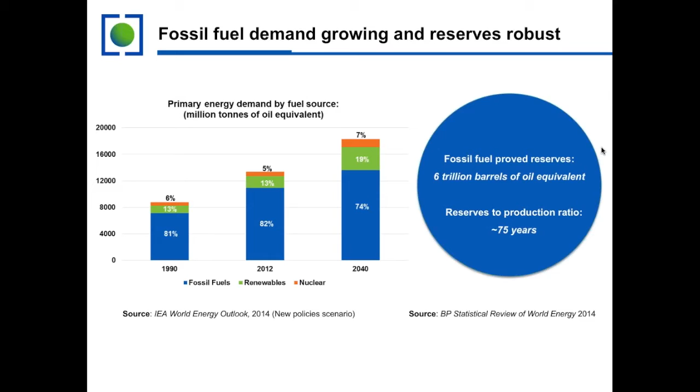We also have projections that tell us that if we continue to emit greenhouse gases into the atmosphere, we'll see significant impacts on the climate. The Intergovernmental Panel on Climate Change, or IPCC, has told us that if we want to avoid the most serious impacts of climate change, we need to limit the increase in global average temperature to 2 degrees C. That corresponds to a concentration of CO2 in the atmosphere of about 450 ppm.

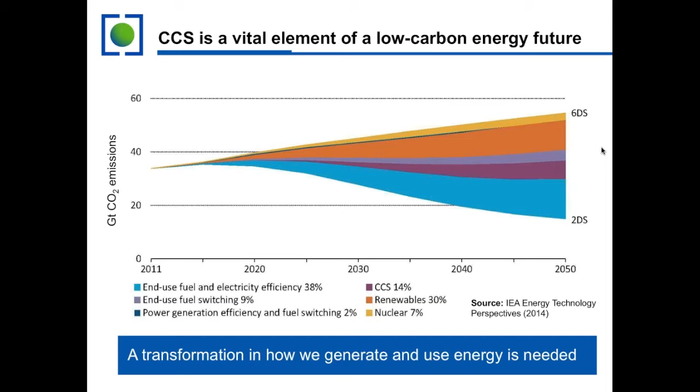In addition, the IPCC conducted analyses that looked at the impact of eliminating different greenhouse gas mitigation measures. Using this approach, they ran several different model scenarios to determine how many could still achieve the 2 degrees C goal, assuming that some of the mitigation options were removed as possibilities. And what they found was that if they removed nuclear, solar, wind, and bioenergy, most of the models could still achieve the goals. The added costs associated with meeting the goals were relatively small for nuclear, solar, and wind. They were a little bit higher for bioenergy.

However, if CCS is removed, most of the models were not able to achieve the 450 ppm goal, and the costs of meeting the goal increased by 138%. So this just shows that CCS is a critical component in decreasing the costs associated with meeting greenhouse gas emissions goals.

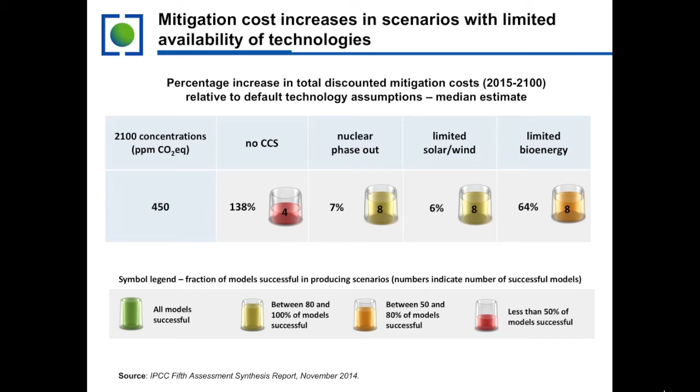So where are we now in terms of CCS development and deployment? If we look at what has been done up to this point, we see a couple of interesting things. First of all, most of the large-scale projects have been in sectors where separation of CO2 from gas streams is really just a normal part of doing business. This graphic shows that.

We've seen a lot of projects associated with natural gas processing, fertilizer production, and syngas production. The one exception to that is the Boundary Dam project, and I'll be talking a little bit more about that later on in the presentation.

If we look over the next couple of years, we see several additional large-scale projects that are projected to come online. In fact, they're projecting that 8 will come online in 2015 and 2016, and that'll represent a more than 50% increase in operating projects globally.

If we look out farther in time, what we see is that there are many more projects that are projected to go forward in the power generation sector, but also important projects that will be moving forward in other sectors such as cement and steel production as well.

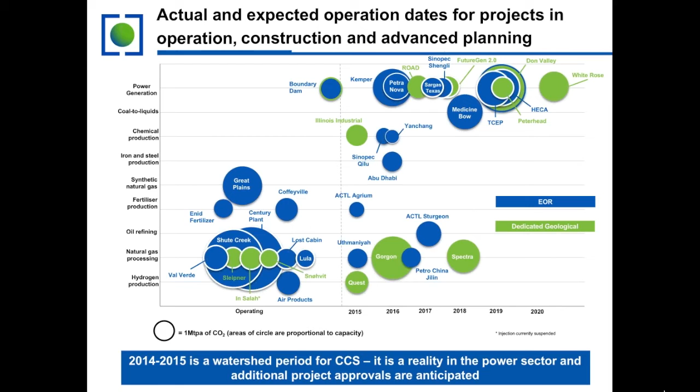In the gas stream that's being treated, you can either use a chemical absorption approach or a physical absorption approach. Chemical absorption involves the formation of actual chemical bonds between the gas and the solvent. They're attractive in that they have fairly fast kinetics. The faster the kinetics of uptake, the smaller the reactors can be.

That approach is useful for low pressure operations, and so low concentrations of CO2 in the gas that's being treated. For instance, post-combustion capture for power generation is typically looking at chemical absorption type technologies. But a significant issue associated with that is that it requires a lot of energy to regenerate the solvent and reverse the chemical reaction. I'll talk a little bit more about that as I move forward.

The other type of absorption technology being used right now is physical absorption. In physical absorption, the gas and the solvent form fairly weak physical bonds. That's nice because it doesn't necessarily require heat to regenerate the solvent, but instead uses a kind of pressure swing to regenerate the solvent. So it's nice for higher concentration gas streams, such as those associated with pre-combustion capture, or in a lot of cases, natural gas sweetening.

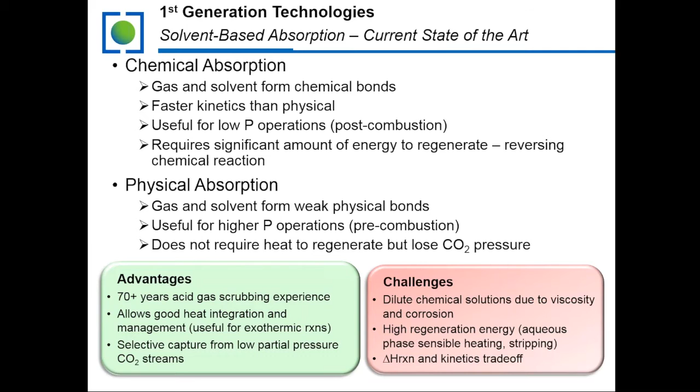Those challenges include the fact that a lot of times the solvents used, the chemical solutions used, have to be fairly dilute. You've got an active solvent that has to be diluted typically in water. For instance, for amine-based capture, the concentration of the amine in the solution is typically on the order of 30%, maybe as much as 40%. It has to be that low in order to avoid problems with viscosity and with corrosion. That then leads to other challenges associated with using the absorption-based technologies.

The Boundary Dam project that I touched on previously is the first project in the power generation sector where capture is being demonstrated at scale. Boundary Dam is a multiple unit power station that burns lignite coal, and previously, prior to this particular project, all of the coal use was unscrubbed, so they didn't have any sulfur mitigation on the plant up to the point of this particular project.

The way this system works, in the picture, that is just the capture plant. The actual power plant would be off to the left in the picture. If you take a look at the picture, on the left-hand side, you have two reactors with kind of triangular tops. The first one is the sulfur removal reactor. The flue gas comes from the power plant and goes through the sulfur removal reactor to bring the sulfur concentrations down to appropriate levels so that the solvent can handle that.

Then the gas is moved into this larger reactor that has steam coming out of the top, and that's where the CO2 is separated from the flue gas. That separated CO2, or the solvent with the separated CO2, is then piped over to this kind of silver reactor sticking up above the top of the building, and that's the stripping unit. There, the CO2 and the solvent are separated from one another, and the CO2 is then moved to a compression system in the building where it's compressed, treated, and sent on for EOR operations in a nearby oil field.

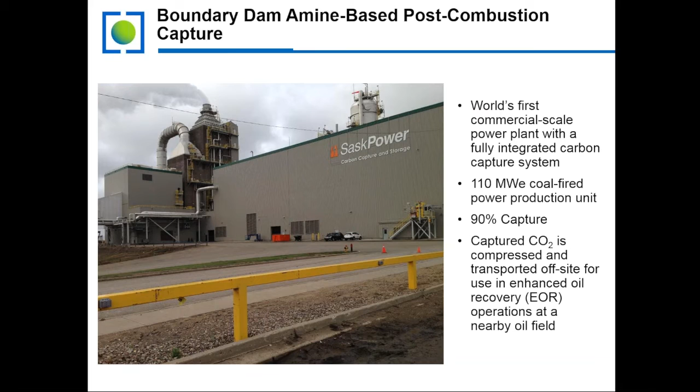Capture systems are in place, but there are still barriers to deployment. One of those barriers is the energy penalty. What that means is that some of the energy that would normally be used in a power system to help produce electricity instead has to be used to drive the capture system, in the form of steam or electricity. That degrades the amount of power generated by the facility by 20 to 30%. Another issue is the cost.

Putting in one of these systems can have a significant increase in the cost of electricity, and that's another factor that needs to be addressed through R&D in the future.

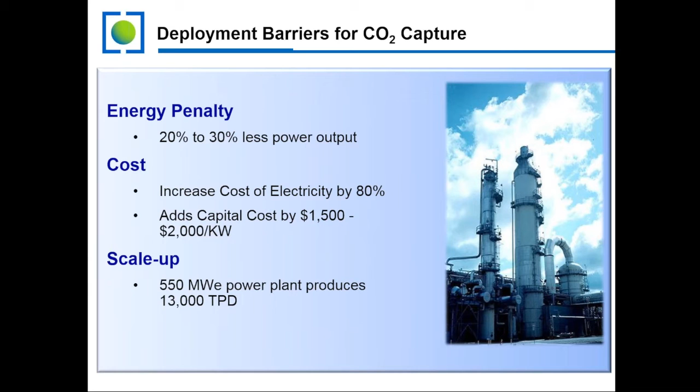Another issue is scaling up these systems. Like I said, they're very large. The unit being treated at Boundary Dam is about 110 megawatts, and it captures about 3,000 tons per day of CO2. A 550 megawatt plant is going to produce a lot more CO2. Up until Boundary Dam, the larger capture units were on the order of hundreds of tons per day rather than thousands.

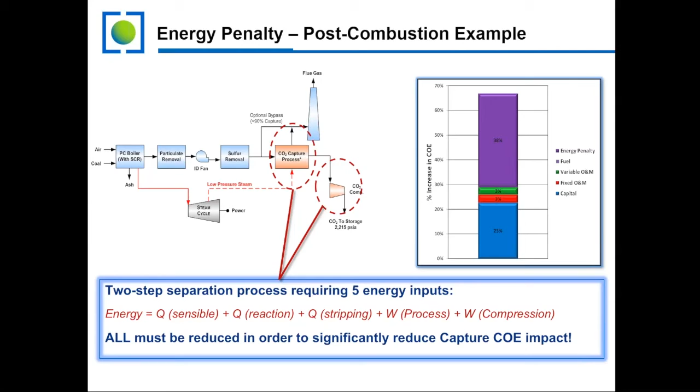You also have a significant electrical energy input into the compression process. In terms of the increase in cost of electricity associated with capture, over half of it comes from the energy penalty, whereas most of the rest comes from capital costs. There are multiple factors that go into that, but the most significant is just the size of these systems.

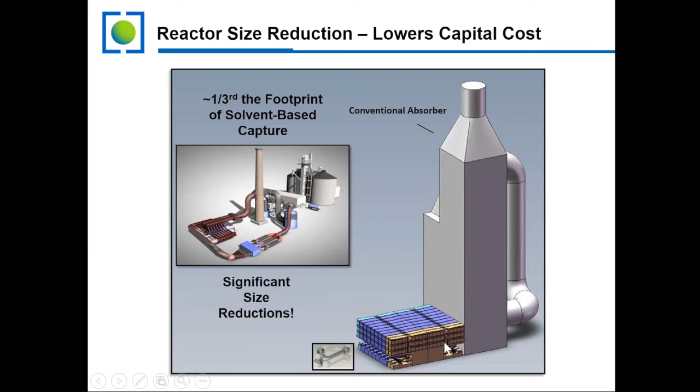This is a drawing of what the Boundary Dam system looks like. One of the goals of R&D in helping to drive down costs is to reduce the size of the equipment. There's lots of concrete and steel that goes into these large units, so if the cost can be reduced, that would be a significant benefit. Some of the technologies depicted here I'll talk about more later, but again, if you can reduce the size of the equipment, the cost goes down significantly.

The Department of Energy has an R&D program in the US trying to reduce the cost of CCS. The targets developed are for second generation and transformational technologies. For second generation technologies, they want to reduce the cost of electricity by 20% compared to current costs associated with carbon capture, and they want those technologies ready for deployment or demonstration starting around the 2020 time period.

They're also funding development and R&D on transformational technologies, which have a more significant reduction in cost of electricity associated with them, and will be ready in the 2030 timeframe. I was just at a presentation the week before last where they indicated their target is going to be a 30% cost reduction for the transformational technologies.

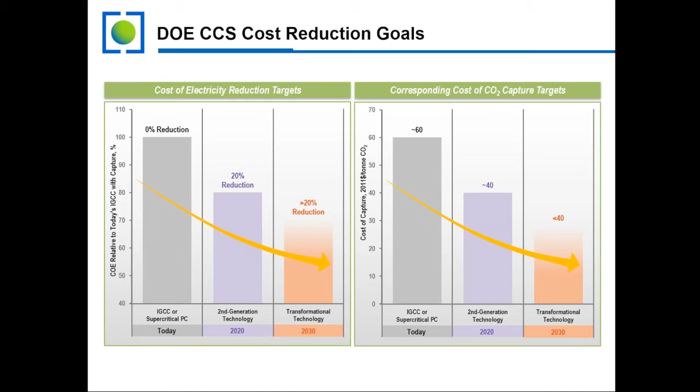One of the areas that's being pursued is CO2 conversion, or converting the CO2 into something else.

Another area is CO2 condensation or desublimation, where you convert the CO2 into either a liquid or a solid and remove it from the capture system, or remove it from the flue gases that way.

Another area that is being actively pursued is CO2 adsorption. So you expose the flue gas stream to a solid sorbent, and the CO2 interacts with that solid sorbent and is removed from the flue gas stream.

Another area is CO2 absorption, and that is the solvent-based systems that we've talked about earlier. Some of those solvent-based systems are in use right now, but there are new solvent or new absorption-based systems that are under development as well to improve the performance.

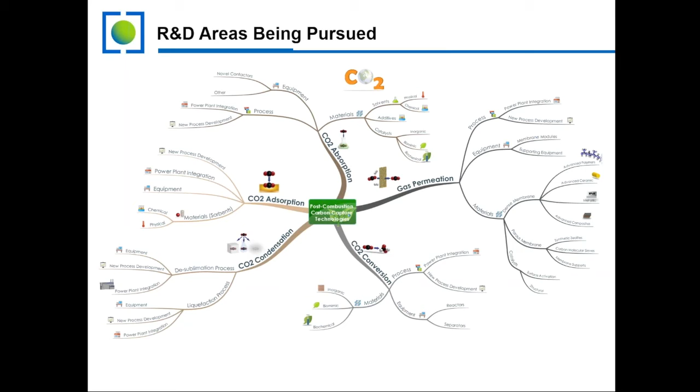So if you take a closer look at one of the arms in that previous figure, what you see is that there are really three basic areas that are being pursued in terms of R&D in each of those categories. And those include materials, equipment, and processes.

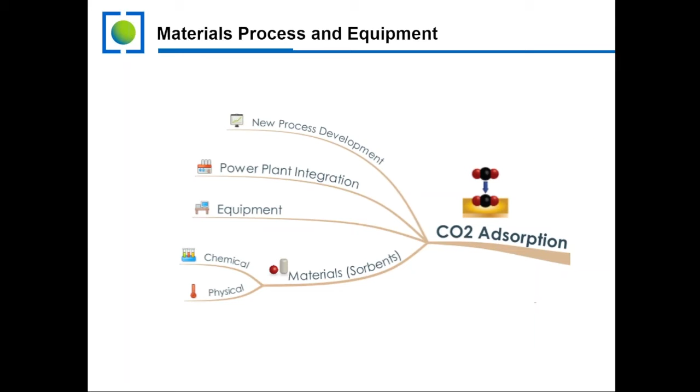So, for instance, for CO2 adsorption, they're looking at materials, solid materials that do a better job of taking up CO2 and require less energy. Different equipment configurations and processes, and I'll talk a little bit more about that. And then different ways of running these systems in more efficient ways.

Again, going back to the DOE program, they currently have a whole series of projects that are undergoing testing at the pilot scale. So these are projects that have already been advanced beyond the laboratory scale and are now being tested at small pilot scale, which is typically in the 0.5 to 1 megawatt range, and then also looking forward to testing them at larger scale in the 10 to 25 megawatt range.

And so if you look at projects that are ongoing right now in the DOE portfolio, what we see is that most of the pilot scale projects will be completed somewhere in the next 2 to 4 years. And then they'll be ready to move on to the large pilot scale.

In the figure, the solid colors indicate projects that are underway and moving forward. The more transparent arrows show the timeline for developing these projects, so that they haven't been funded yet, but that's the time frame under which they would most likely move forward.

And so what you see here is that for the most part, they are targeting large-scale pilots up to the 2020 timeframe, maybe just a little beyond, and then demonstrations following that in the 2020 to 2025, 2026 timeframe.

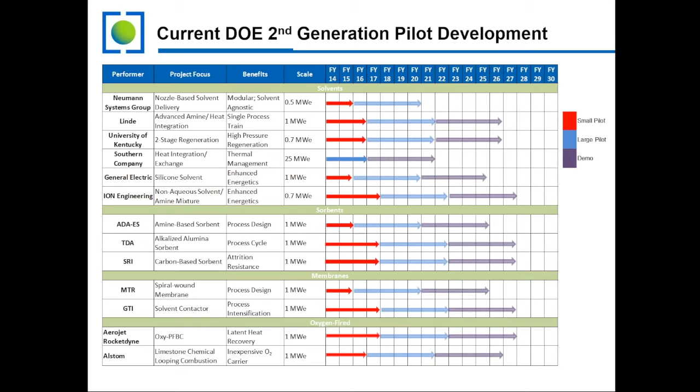There are too many of them to talk about all of them, but I wanted to provide just a few examples of some projects that are moving forward in this pilot scale development effort.

So one of them is a project that is being conducted by the Neumann Systems Group. This is a group in Colorado that is developing a contactor, a nozzle-based contactor that improves the contacting of the solvent stream with CO2, with the flue gas stream. And one of the significant advantages of that particular technology is that it allows for significant size reductions.

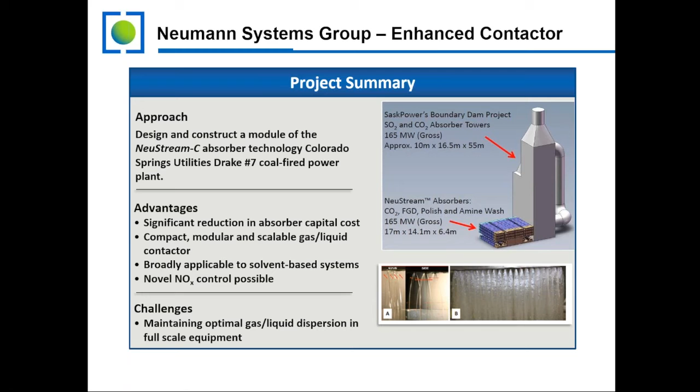And so this is a graphic depicting that. So again, looking at something the size of the Boundary Dam project, for the equivalent treatment of an equivalent size gas stream, the Neumann reactor would be much smaller, and again, drives down capital costs in a significant way.

Another project that is ongoing is by Southern Company at Plant Barry. And here they're testing a Mitsubishi solvent at a 25 megawatt scale. And the project specifically they're looking at here involves heat integration of both the power plant and the capture system to use heat that would normally be wasted.

And so if they can use that heat, they can increase the efficiency of the overall process and thereby reduce costs. And so this is a project that is focused on process for the most part, but also some equipment in the specialized heat exchanger that they're using to facilitate this process.

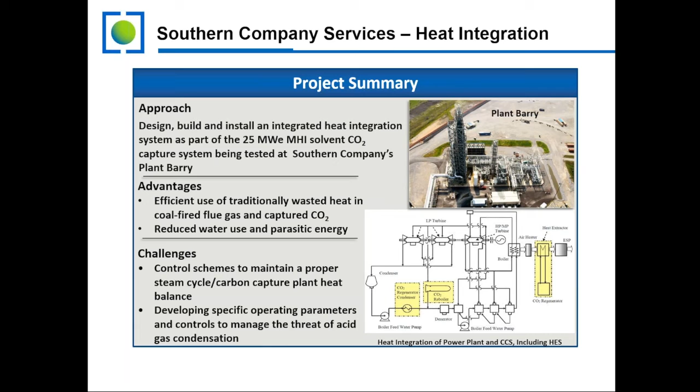Another one that is solvent-based is by Linde, being conducted at the National Carbon Capture Center in Alabama. They are doing a 1 megawatt slipstream test, and they've recently increased their treatment volume a bit, so they're at almost a 1.5 megawatt slipstream scale. There they're testing a solvent with improved characteristics in terms of uptake and regeneration. As part of that, they're projecting much lower electrical load through capital cost reductions and smaller reactors. Only one reactor train would be able to treat a 550 megawatt power plant, for instance.

So this is an area where they're really doing all three areas. They're doing advanced testing on an advanced solvent, a material, and they're doing some unusual process things, using some novel heat exchange approaches as well.

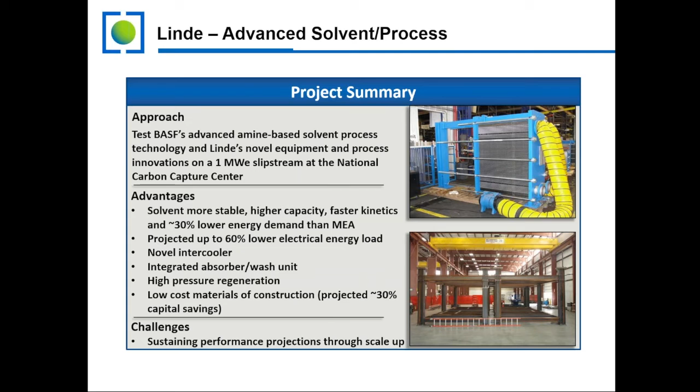Another project conducted at pilot scale is by ADA-ES, looking at an amine-based sorbent. They're doing their testing at Plant Miller, another Southern Company facility. There they're testing a process that uses an advanced amine-based sorbent, trying to see if by using that approach they can reduce costs.

Sorbents have some inherent advantages, one of which is that you're not required to move around and heat all of the water associated with some of the solvent-based systems. Because of that, you have some energy advantages. But there are challenges as well in terms of sorbent attrition and solids handling, and they're working through some of those in their current project.

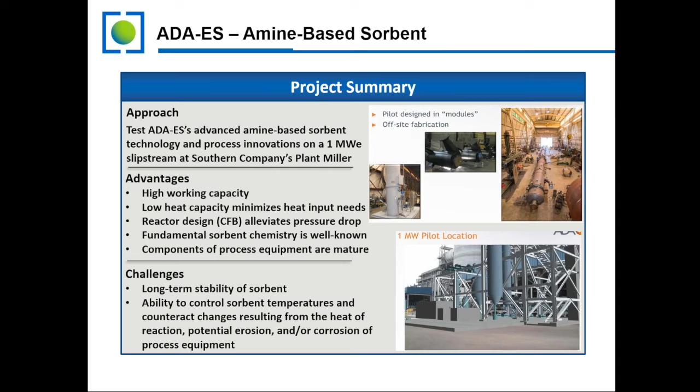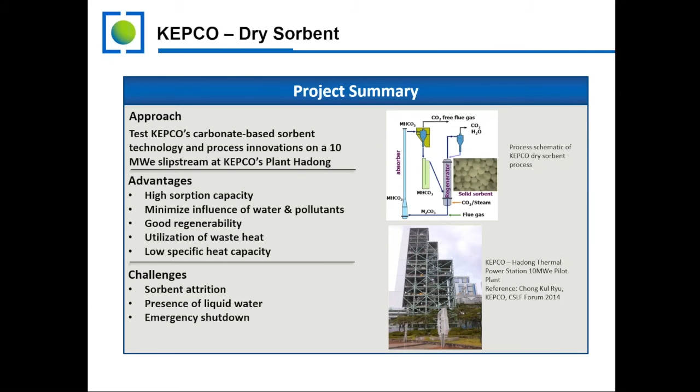Another sorbent-based project is a KEPCO project using a carbonate-based sorbent, tested at a 10 megawatt scale. There are some distinct advantages to the sorbent material they're using, and to the process they're testing, to try and make that technology operable for these power plant systems.

MTR, which is Membrane Technology and Research, is also testing a 1 megawatt scale system at the National Carbon Capture Center. They are using an advanced membrane they have developed, called a Polaris membrane. Over their development process at smaller scales, they have done a really good job at increasing the permeance and selectivity of their membrane materials so that they are applicable to these large-scale utility systems.

They've also come up with a process that involves an air sweep. The goal of the process is to increase the concentration of CO2 in the gas stream entering their main membrane, so that way they increase the driving force and make the membrane more effective. They have been testing this 1 megawatt system for about a year, and they will be finishing up their testing at the NC3 in the next few months.

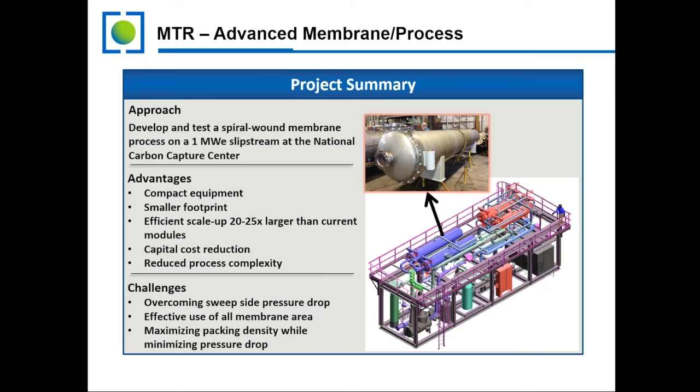Another process being pursued is calcium looping, being pursued at a couple of different places in Europe and in Asia. This is a process that allows high capture, and it's a relatively high temperature process, so it's effective. But they're testing now to see if they can use the process, integrating the different components in such a way that they can help increase the efficiency of the associated power generation facility.

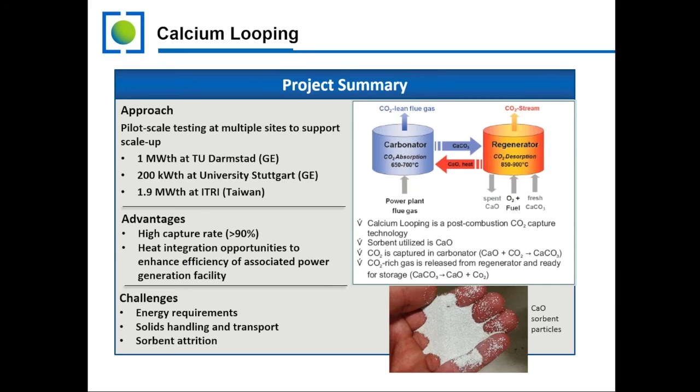In terms of oxy-combustion, one of the projects ongoing right now is by Aerojet Rocketdyne. They're testing a 1 megawatt thermal unit, which will be tested at CANMET facilities in Canada. This is a system that uses pressurized operations to help increase the efficiency of the process. It allows for recovery of latent heat at more high quality, and has potential for decreasing costs associated with oxy-combustion in a significant way.

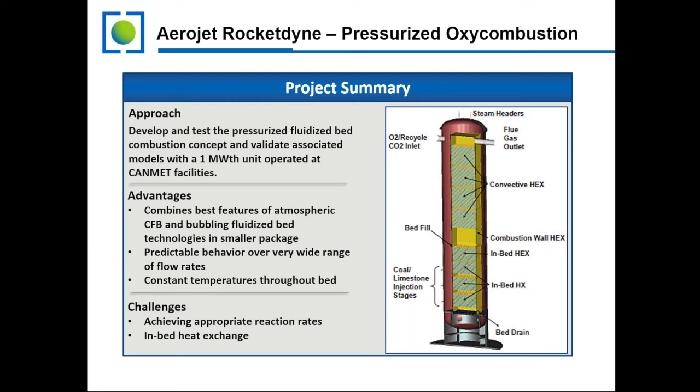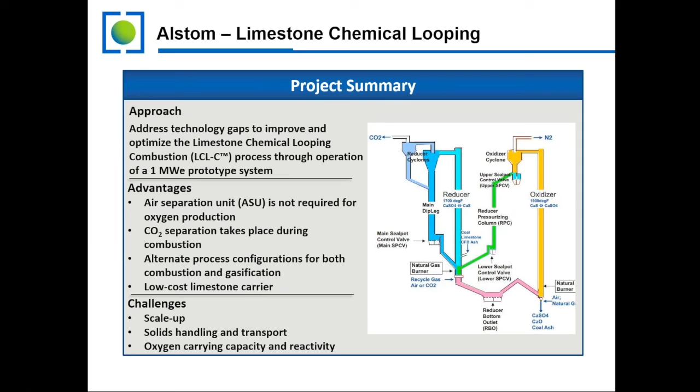The last second generation technology I wanted to talk about is an Alstom chemical looping technology, which uses limestone as their sorbent. Chemical looping is a process very different from most of the other processes we've talked about, but it has significant potential in terms of cost reductions. It would use smaller equipment than is typically used in power generation, and also has the potential to result in significant reductions in CO2 capture costs. One of their projections indicates it could achieve capture costs of under $30 per ton.

They were also looking at some of the experimental aspects, looking at advanced manufacturing that could then be used to create these capture systems in a more efficient way and decrease the costs associated with that.

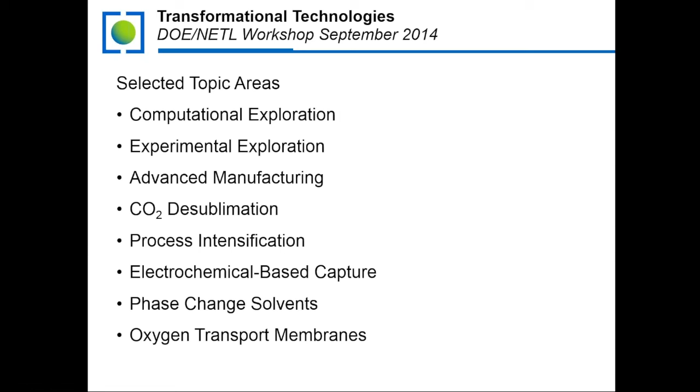I wanted to talk a little bit about just a few specific projects here.

One of the interesting ones being developed is by ATK, and they're using supersonic expansion to solidify the CO2 in the gas stream and then separate it out. They're currently testing at a 0.25 to 0.5 megawatt scale. It's got significant advantages in terms of operations, no moving parts, no chemical handling to deal with, and one of the most interesting parts is that the scale would be much smaller. If you take a look at the picture, the larger unit is the pilot solvent testing unit at NCCC, and an equivalent unit of this supersonic expansion technology that would treat an equivalent amount of gas is the one shown at the very bottom of the picture. You can see it's a huge difference in the size of equipment that would be required.

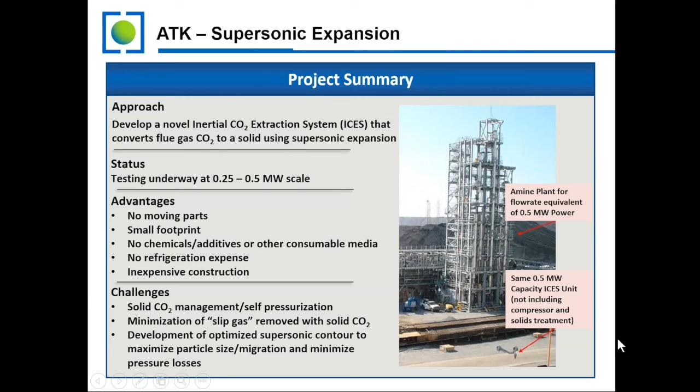Another very interesting approach is one being developed by FuelCell Energy, where they use fuel cells to capture CO2 and produce power at the same time. That's a technology being tested that shows great promise. One of the things they talk about is that if they were to capture carbon from a 550 megawatt power plant, they would generate an additional 400 megawatts of power associated with their process. So it has real potential to have a significant impact on capture costs moving forward.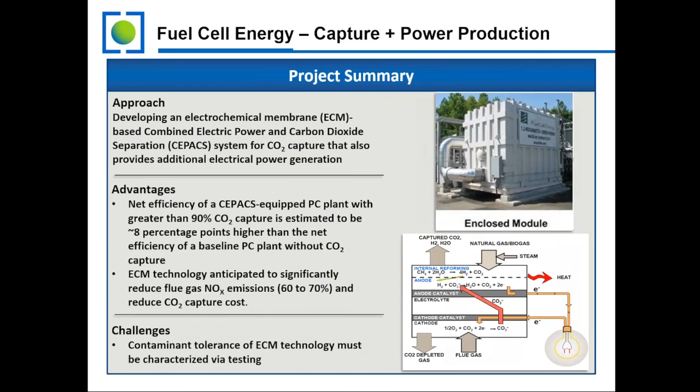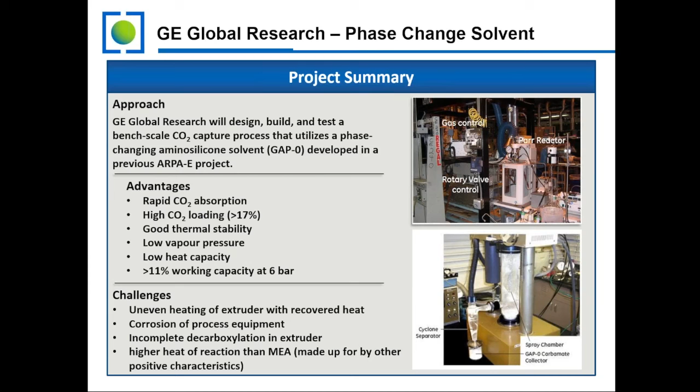Another interesting area is looking at phase change solvents. GE Global Research is involved in a project looking at an aminosilicone solvent that was developed as part of a previous project. This solvent, when exposed to CO2, forms a solid. GE is looking at a process to capture that solid and regenerate the liquid phase solvent after they drive off the CO2. There are real advantages in terms of loading and thermal stability, and being able to generate the separated CO2 at pressure, which would reduce compression costs.

So just to summarize, we've covered a lot of different areas that are interesting in terms of the technologies being developed, but they all boil down to really three main areas that they're trying to pursue: materials, processes, and equipment.

In terms of materials, they're trying to develop higher performance solvents, sorbents, and membranes that have faster kinetics so that they can decrease the size of the reactors, lower stripping energies so that the energy penalty isn't quite as bad as it is now, and increase the permeability and selectivity of membranes to drive down costs.

In terms of process improvements, they're looking at different ways to integrate heat and to move different processes into single reactors, for instance, and that would decrease the costs associated with building those capture units.

And then in terms of equipment, they're looking at novel designs, novel ways of contacting the solvent or the absorption medium and the capture medium, doing it in a way that decreases the sizes of the reactors, and also looking at advanced manufacturing techniques to make those reactors and that equipment smaller and easier and less expensive to produce.

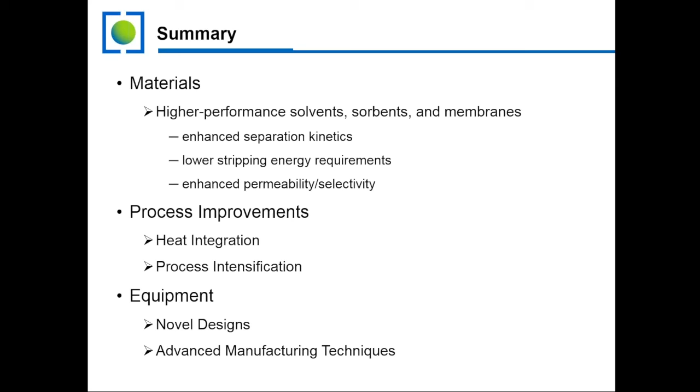Okay, so with that, I'll turn it back over to Diane and answer any questions that people might have.